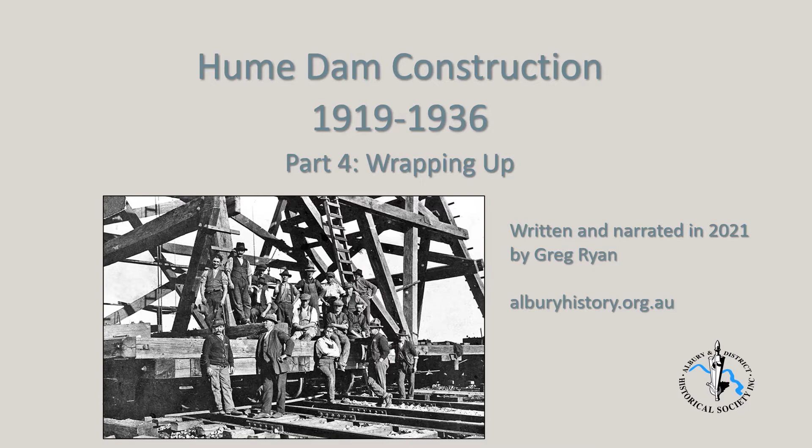This is a group of quarry workers dressed for work. They wore no safety equipment - hard hats, fluoro vests, work boots and the like were missing. Many of these men, perhaps most, were returned soldiers. They were used to hard work and difficult conditions.

Estimates of workforce numbers vary widely. In the mid-1920s, at the peak of construction, there were more than 1,200 workers, all male.

We have a set of numbers for 1927. The Victorian Embankment construction site had 355 men working on that part of the project. New South Wales had 650 working on the spillway, and there were a further 89 men employed in construction of the Basin Bridge. When the economic depression of the 1920s and early 1930s bit hard, these numbers dropped significantly and the whole project slowed down.

The men worked a 48-hour week, 8 hours a day, 6 days a week. After industrial action, this was later reduced to 44 hours, giving the men Saturday afternoon off work.

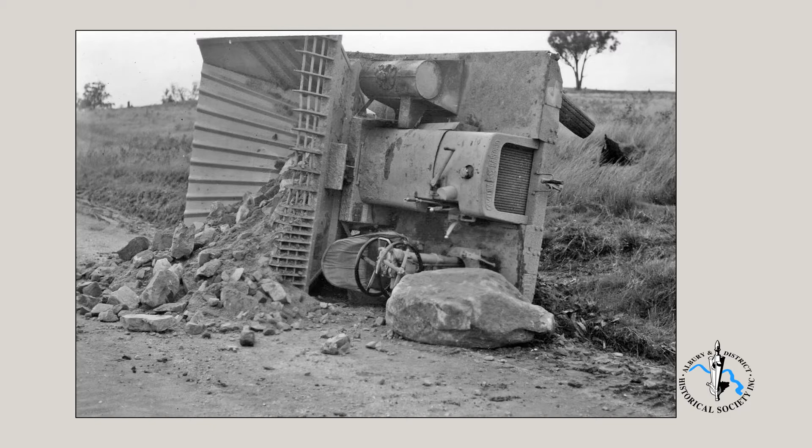Manual labour was harsh. With such a large workforce and dangerous working conditions, accidents were always waiting to happen. There were many serious accidents, many of which left workers with permanent disabilities. But surprisingly, there were few deaths.

The most serious accident occurred on October 25, 1921. Jacob Gehrig Sr., aged 55, George Pearce, 62, and William Wakeford, 17, were killed while attempting to retrieve unexploded blasting powder.

On April 17, 1923, Henry Stanley Meade, 19, was crushed between rail trucks on the New South Wales side.

In an accident not related to construction, on November 24, 1925, John McNamara, 43, fell from the elevated back veranda of his house, striking a wood horse.

On March 30, 1928, John Glen was a driller working on the face of the stone quarry when his drill jammed, and in endeavouring to free it, he missed his footing, falling 20 metres to his death.

On April 16, 1935, Jack Newman, 37, a carpenter, was killed when he fell 12 metres onto concrete from wooden decking. In a bizarre twist, a workmate, Jack Meads, aged 30, was hit by a car and killed in Mate Street, Albury, while riding his bicycle home after attending Newman's funeral.

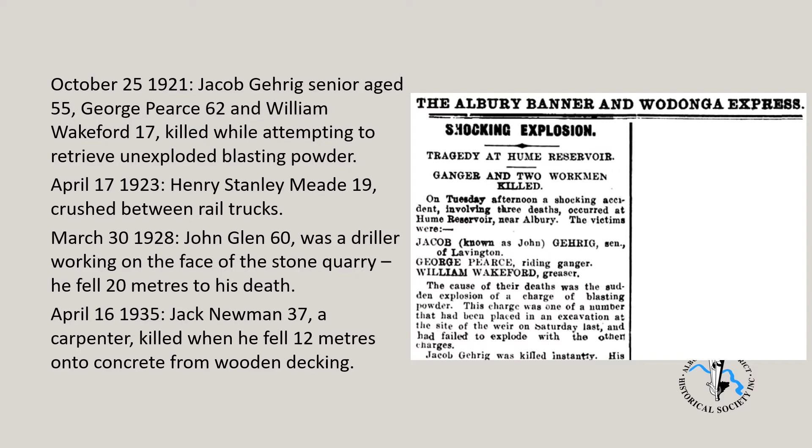Housing was provided for workers at Weir village for New South Wales workers, and at Junction, sometimes referred to as Ebden, for the Victorian workers. There were barracks for single men and houses for workers with families.

The workers and their families were provided with free firewood, water and electricity for lighting, but there were no phones, no electric appliances, no hot water and no radio.

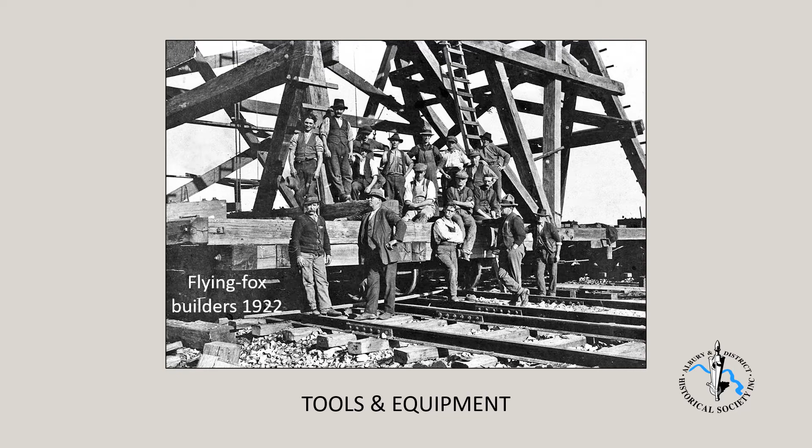The Flying Fox is now in place on the New South Wales side of the site. It was about 25 metres tall, and the tower could move about 115 metres east to west on 4 rail tracks, so that it could deliver loads to most of the spillway worksite. It could lift and carry 10-tonne loads across the 400 metres to the southern side of the spillway.

A man sitting in a small enclosure at the top communicated by telephone with supervisors below to operate the Flying Fox. It was held down by about 300 tonnes of concrete blocks at the base, giving it a low centre of gravity.

Behind the Flying Fox is the coal-fired power station building, generating electricity for the New South Wales worksite. Beside the generator building is the power station's condensing tower.

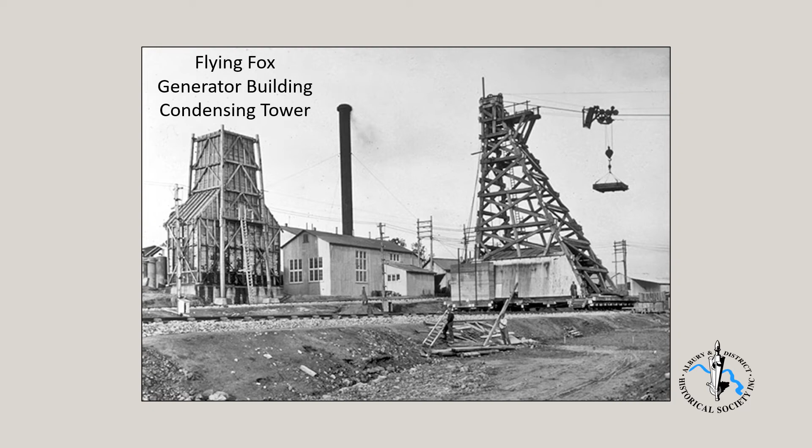This is a photo from the top of the Flying Fox Tower with the 4 railway lines below, across which it could move 115 metres back and forth, east to west. We also get a good look at the condensing tower and the power station building and a quickly filling lake in the background.

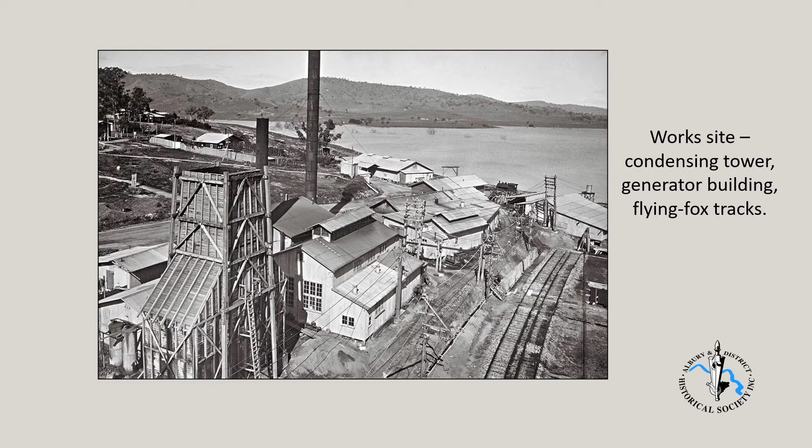A variety of cranes, diggers, scoops and navvies, mostly wood-fired, were deployed. Both quarries made considerable use of rail on which to run their cranes, loaders, etc. Steam locomotives were used extensively.

New South Wales had a line inside their cofferdam to remove rubble while excavating for the spillway foundations. Victoria had 10 steam locomotives working on the embankment. New South Wales had 4. Their busiest route was to and from the quarry near Bethanga Bridge.

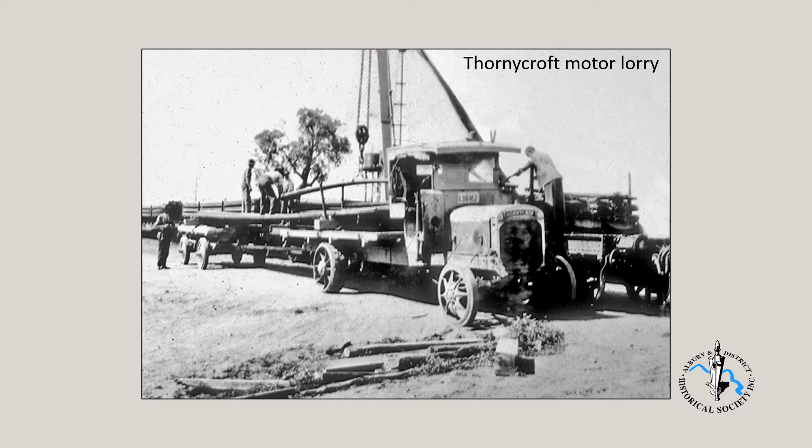There were 2 huge concrete mixers, sometimes exceeding 3,000 bags of cement consumed in a day. This translated to over 700 cubic metres poured on site in an 8-hour working day. 25,000 bags of cement were kept on reserve at the site, with that many again at the North Street siding in Albury.

This is the New South Wales quarry. Two quarries were established, the one in Victoria providing earth fill and clay for the embankment. In New South Wales, the stone quarry on the eastern side of Hawksview Hill supplied good quality granite.

Rocks blasted out of the quarry face were used as plums in the spillway wall. These rocks make up about 17% of the spillway wall. Some of the rocks were taken to the crusher at the quarry, which provided crushed rock for use in concrete.

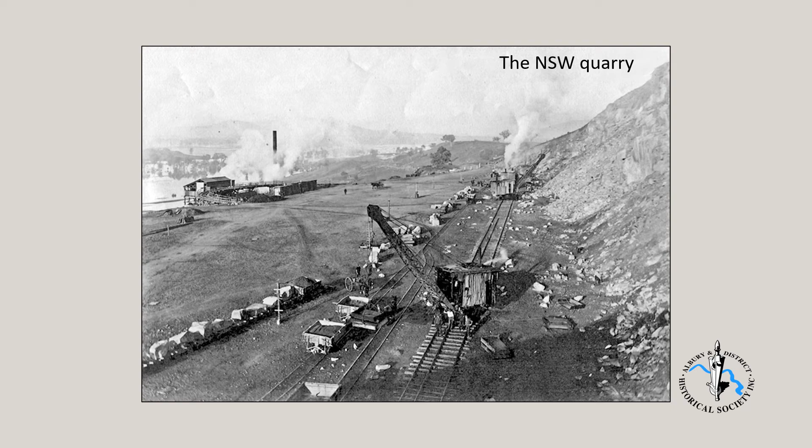Much of 1936 was used to clear up the site, including the villages. Three months before Governor-General Lord Gowrie symbolically opened a valve on November 23, 1936, signifying the dam's completion, a massive auction sale took place. Over 3,000 lots were offered for sale over 6 days. Items included locomotives, trucks, rails, electric motors, generators, stone crushers, steamrollers, lorries, stores, buildings, houses, boilers, and even an automatic telephone exchange.

Environmental problems started well before the dam was complete. One problem not so well known was caused by the rotting vegetation as the dam filled. It resulted in excessive growth within the lake of blue-green algae, or more correctly, cyanobacteria. For more than a decade, downstream users complained of the putrid taste and smell of their water.

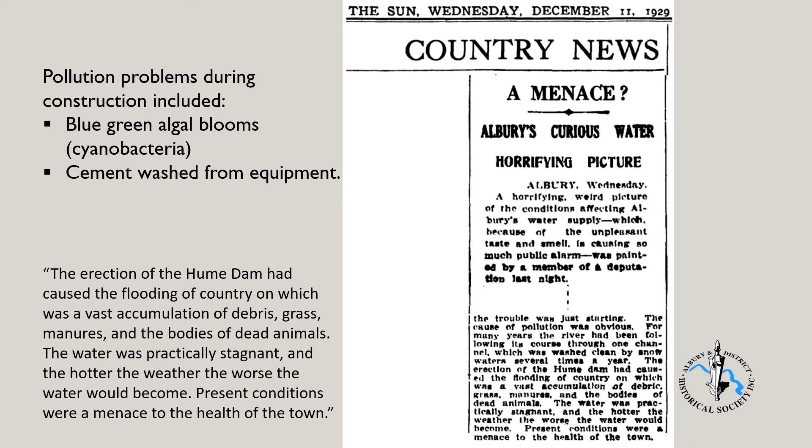River management was an issue that created headaches for Albury town councillors in 1939. Following a severe drought, the River Murray Commission decided that to refill an almost empty Hume Dam, there would be no releases from the dam. The result was just a muddy pool at the waterworks, from which Albury's water supply was drawn. Fortunately, this problem was resolved and not repeated.

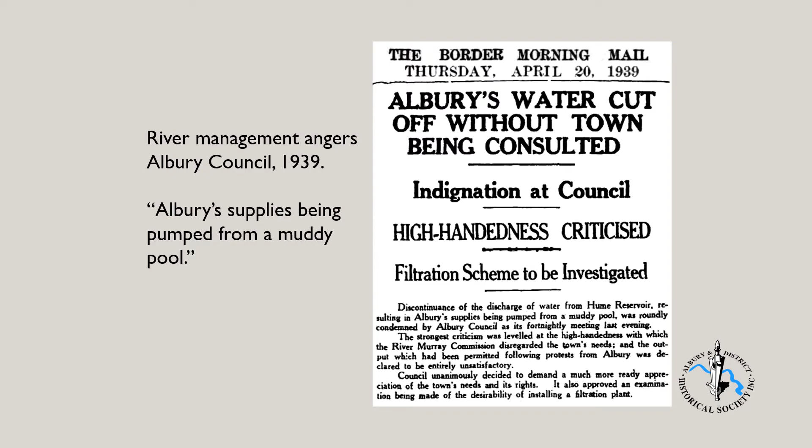We will now consider a few of the environmental impacts since completion of the dam. Providing an assured water supply has supported agriculture, which in turn results in more use of agricultural chemicals. While this contributes to elevated agricultural production, some of these chemicals are toxic, and others result in accelerated blue-green algal growth.

Control of river flow is a factor increasing salinity in the Murray-Darling Basin. In the river's natural flow, salt gets washed to the sea, but less water now flows out of the Murray mouth, and this means more salt is left on land. The dam has also thrown up some ecological challenges that we are continuing to deal with. Arguably, the most significant of the problems caused by containing the water of the Murray River and its tributaries has been the effects of the inversion, or reversal, of the natural seasonal patterns of river flow.

Before the Hume Dam, the Murray was normally at its peak of flow during winter and into spring, with low water levels experienced during summer and into autumn. This natural flow is now reversed, with water stored in winter and released in summer for irrigation, so now we have low winter river levels and high summer levels.

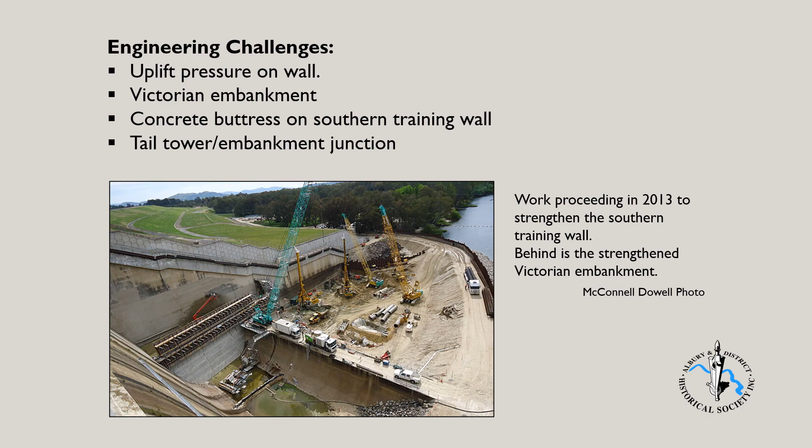But notwithstanding these problems, we can't underestimate the dam's significance and the positive impacts of the dam's construction. The dam was and is one of the great engineering works in Australia. It is well sited, huge and built by a combination of manpower, horsepower and steam power. Having cooperation between the federal and 3 state governments must be recognised as a significant political achievement.

Recall that the Royal Commission of 1902 highlighted 3 priorities for the River Murray Commission: navigation, irrigation and a stable water supply. Discounting navigation of the river, as it was already becoming irrelevant in 1902, 2 of these aims have been achieved.

The Murray-Darling Basin supports about 70% of Australia's irrigated crops and pastures, and by 2021, agriculture was generating an estimated $24 billion each year.

In 2021, the Murray-Darling Basin is home to almost 3 million Australians, and while droughts will always be an issue, they are less frequent. And likewise, flooding, while still a significant problem, is less frequent and generally its effects are less severe.